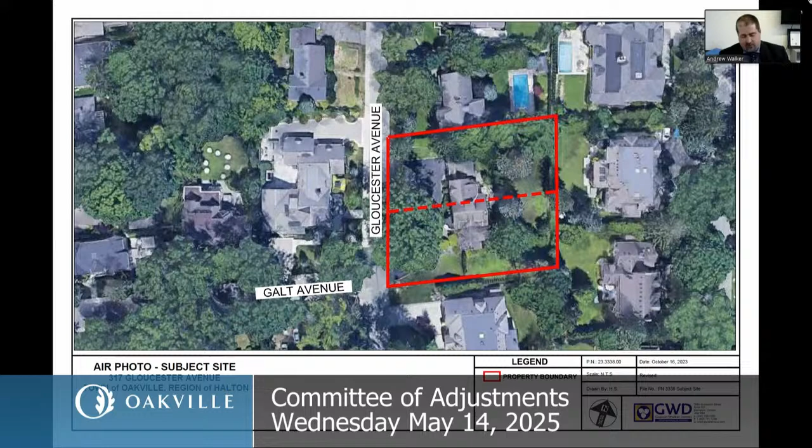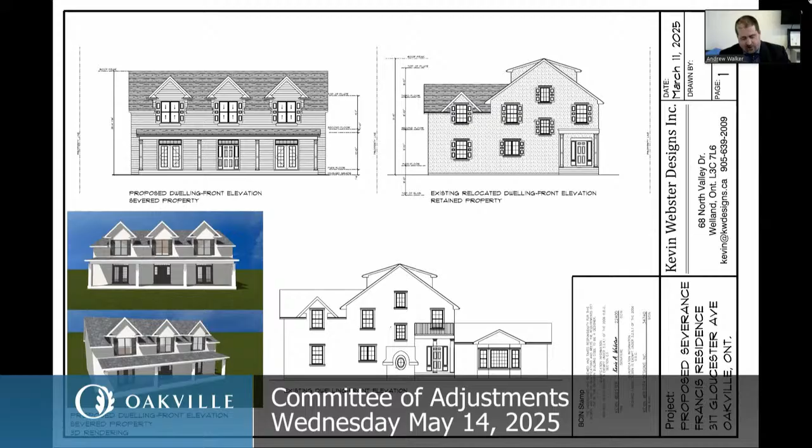I reviewed the variances in the context of the four tests as described in my March 11 cover letter, and am of the opinion that the applications meet the four tests, represent good planning, and are supportable. I've read the staff reports associated with the applications and wish to address some comments made therein. In this respect, I do not agree with staff's position that the applications be denied.

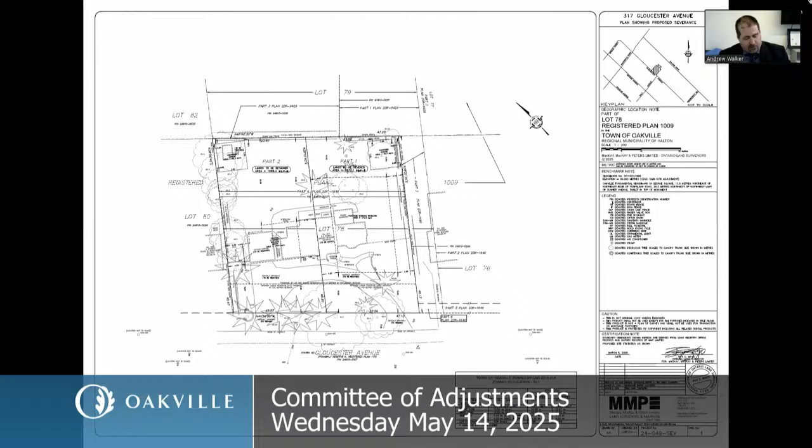One concern raised by staff is that the applications result in lots that are not in keeping with the predominant lotting pattern. I note the predominant lotting pattern in the area is single detached residential, and the proposal results in two lots accommodating single detached dwellings. Further, policies 3.9 and 4.3 of the official plan note some growth and change may occur, including intensification, provided the character is preserved and the overall urban structure is upheld. The proposed development maintains and preserves the overall urban structure, as the proposals for two single detached dwellings are in an area designated for such uses.

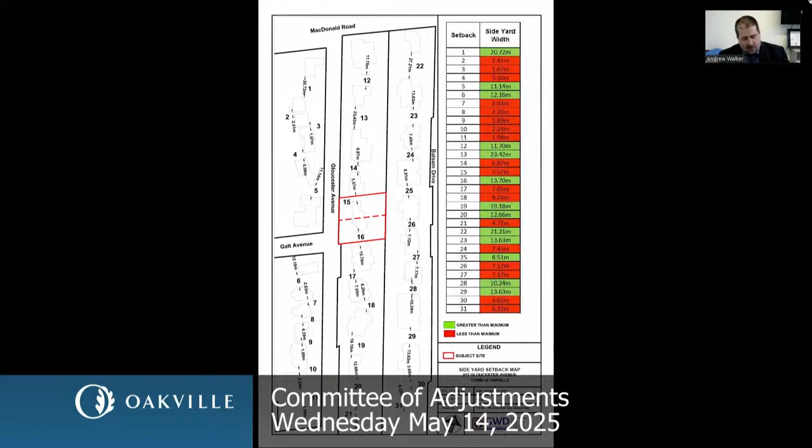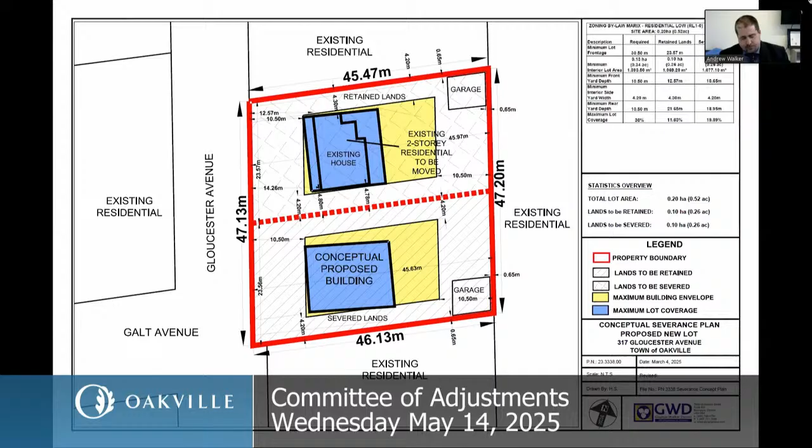Variances result in residential lots sufficiently sized to accommodate single detached dwellings in keeping with the area character. I've undertaken a review of lot areas and frontages within the neighborhood included with the application package, and note there is a wide range, including several lots within the same special policy area with lesser frontages than what is proposed. Another concern raised by staff is that the proposed severance and variances would not maintain the integrity of large lots per policy 28.2 regarding the special policy area.

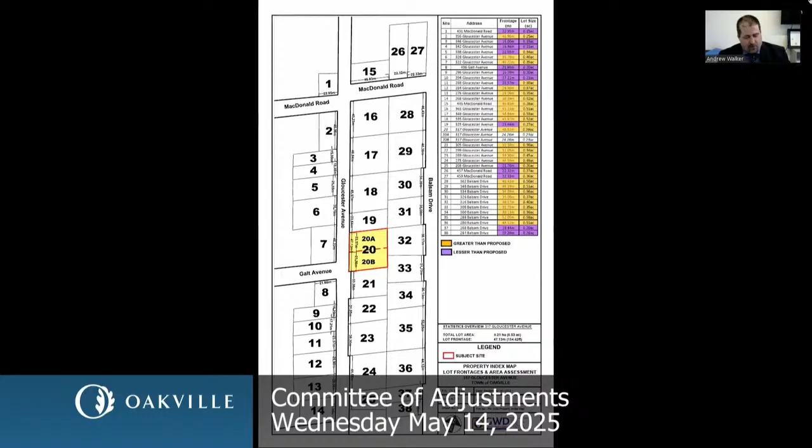Staff do acknowledge the proposed application meets the maximum permitted density of 10 units per hectare, it being 9.09. However, they suggest the proposal does not maintain the integrity of large lots of this special policy area. The official plan does not define large lot; as such, this interpretation is subjective. The proposed reductions are modest and reflect the range of sizes in the area, resulting in lots with frontages over 23 meters each, large lots by any stretch of the imagination.

Another concern relates to maintaining and protecting existing neighborhood character and compatibility. According to staff, the proposal does not conform with policy 30.14.2, which provides direction on granting creation of new lots, noting criteria regarding size, shape of lot, requirements of the zoning bylaw, and whether what is proposed is appropriate and compatible with adjacent lots. Other than the modest relief being sought, my client is not seeking any other variances.

I submitted a summary of side yard setbacks in the surrounding area with the applications, noting there are numerous examples where the combined side yard setbacks are below the minimum. The proposed lots are large enough to accommodate the dwellings with appropriate interior side yard setbacks. In addition, staff note policy 31.5 providing the definition of compatible. I'm of the opinion that the proposal provides large frontages and areas capable of accommodating all required setbacks and as such meets the definition of compatible.

A further concern raised is the inclusion of lands on the west side of Gloucester in the analysis of neighborhood context, as they are located outside the special policy area. One experiences neighborhood context by experiencing both sides of the given street. Regarding staff's opinion, it is important to note that the proposed lots are both twice the size of any of the lots located on the west side.

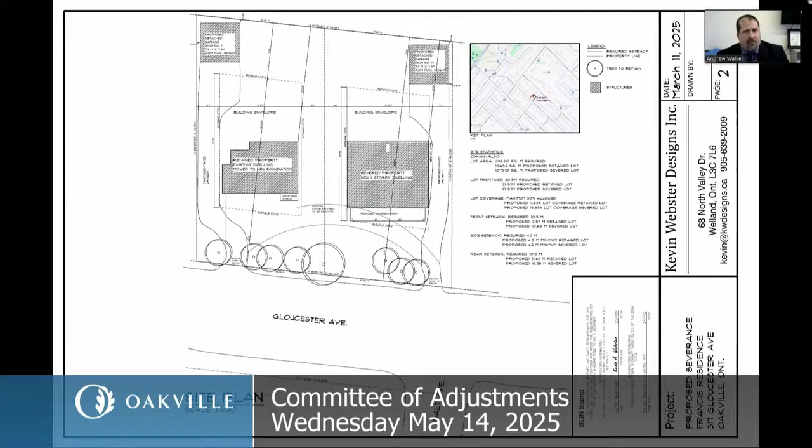This concludes my presentation. I seek the committee's indulgence in supporting the consent to sever and minor variance applications, and I'm available for any questions or comments. Thank you.

Okay, thank you. Ms. Price, do you have any questions for the applicant? Not at this moment, no. Thank you. Mr. Dickie? You're muted, Mr. Dickie.

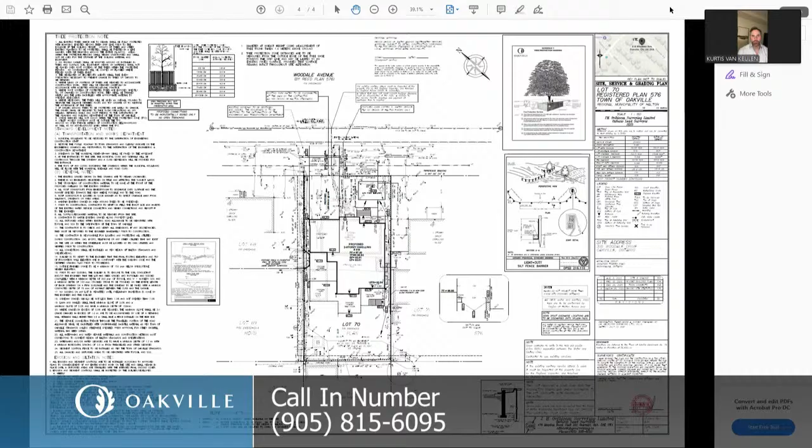Thank you, Mr. Chair. My name is Kurtis Van Keulen, representing the owners of 318 Woodale. Before you, we have an application for minor variance, for one minor variance seeking relief from the zoning bylaw, which is a lot coverage variance. We are seeking 38.6%, where 35% is required.

I want to note that we have reviewed staff comments. We agree with staff comments. They are in support of the application. We are in agreement with the conditions as well.

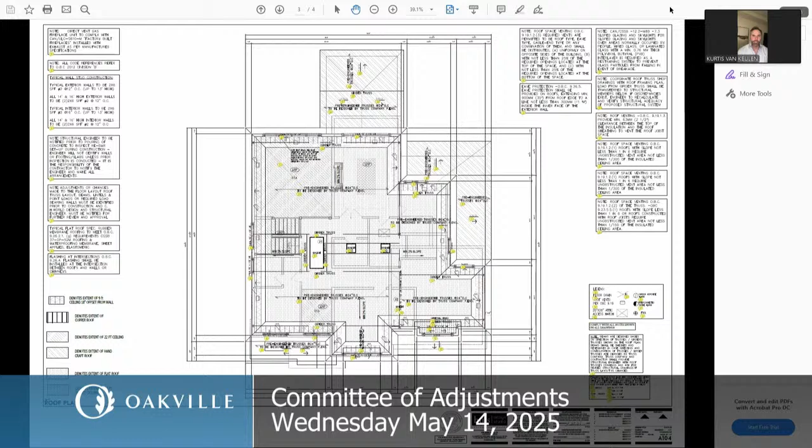I wanted to speak mostly to the contributing factor of the lot coverage variance. It is comprised mostly of a rear single story structure, a rear covered porch. It is single story in height, and it mitigates massing of the main portion of the building to the rear. There is also a good portion that is an uncovered concrete porch.

During construction, the owner, working with town staff and through the inspection process, decided to use the area under the concrete porch as part of their basement space. So they changed the plans, working with town staff and the inspections team. We submitted an application to the building department for a revised building permit, which went through review and identified this lot coverage variance. We then filed the variance application, and we're here before you tonight.

Again, the massing of the structure is of very little impact on the neighboring properties, with more than 50% of that structure below grade, which is not counted by default. The way the zoning bylaw interprets the uncovered concrete porch with a living space below it, it loops it into the lot coverage variance and requires it to be counted. So I want to stress that the impacts on the neighborhood are next to nothing, because most of that is below grade.

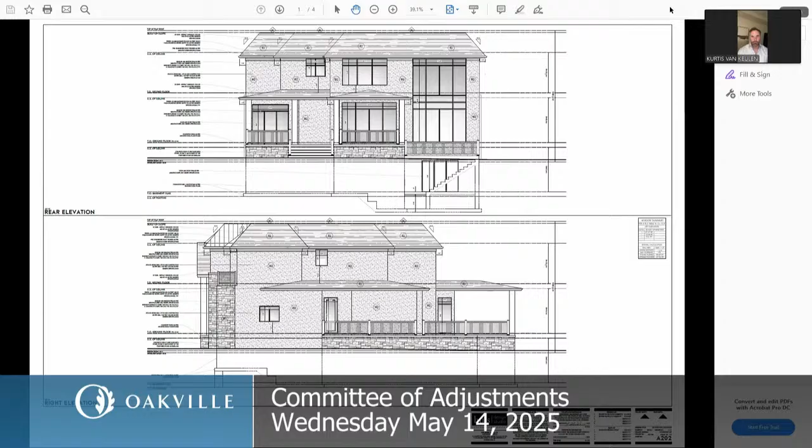Thank you. So just for clarity, do you still require a revised building permit? Yes, technically we do require a revised building permit, and it is in process. The only condition with that revised building permit right now is this minor variance approval for the change in the basement plan, which utilizes the area under the covered and uncovered porches.

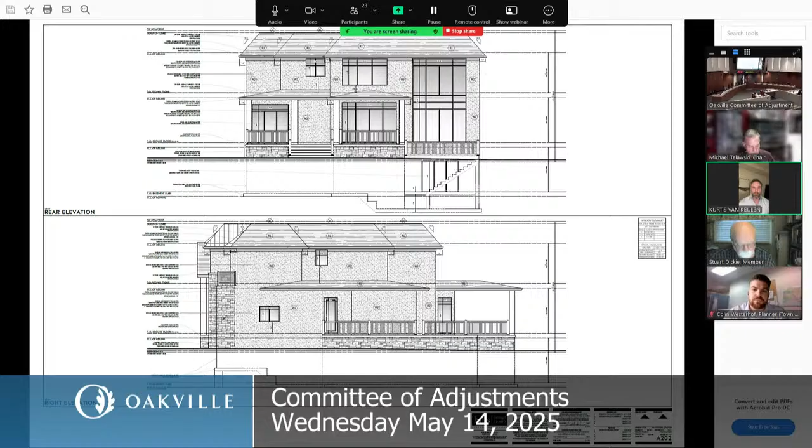And so again, just for clarity for anybody watching or even for the committee, this variance isn't being triggered by the covered porches. It's because you're now including the basement, the area under the back patio, as livable space, and that triggers that area to now have to be considered coverage as if it was just a rear deck, porch, or patio. Without that, you wouldn't require this variance. That is correct, Mr. Chair. Thank you. Okay, thank you.

Mr. Dickie, do you have any questions for the applicant?

I don't know if I wasn't looking in the right spot, but usually when somebody comes in for lot coverage, they tell us how big the footprint is, how big the front and rear porches are, and what percentages. So if you would do that for me right now, I'd appreciate it.

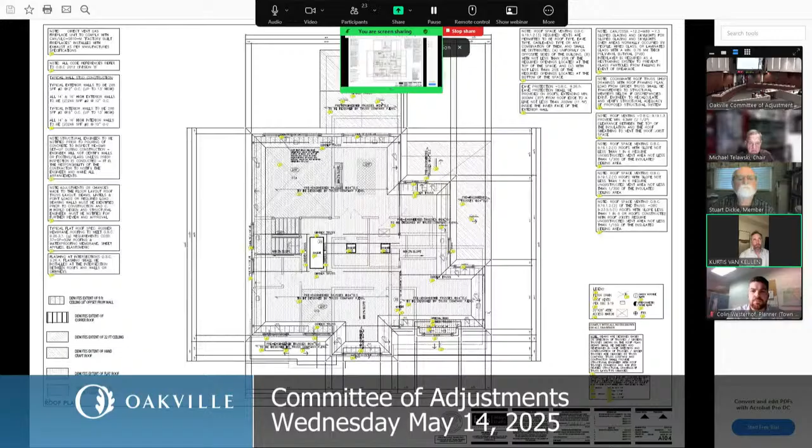Sure. On the site plan, if staff wants to pull it up, we do have a lot coverage breakdown on the right-hand side of the page. I believe it's the last slide of the supporting documents submitted, just under the key map, top right corner. The total lot coverage is given there.

And I do have a breakdown here. We have a small portion of the front covered porch, about 4 to 5 square meters. We have a rear covered porch of about 14 to 16 square meters, and an uncovered porch that puts us over the area, about 15 to 16 square meters.

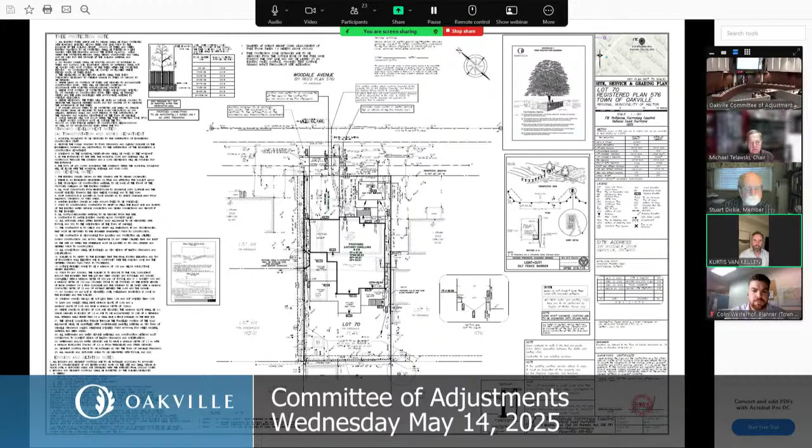So the covered porches combine and are included in the lot coverage, and the dwelling itself is well under the allowed lot coverage. If you zoom in on the bottom left corner of the dwelling footprint, you can see a large uncovered porch and two small covered porches. The main massing of the building is well under the 35% required.

Obviously, I couldn't see that. It's a bit hard to see some of these, through you, Mr. Chair. Hold on, I'm on the right page, but it doesn't tell me. I'm sorry, I asked you, what was the footprint?

What percentage of the lot is that footprint of the house? What is the porches' square footage or meters, and what are the percentages of the lot? I don't see that on the piece I'm looking at. You're saying on the one in front of us, that information is there?

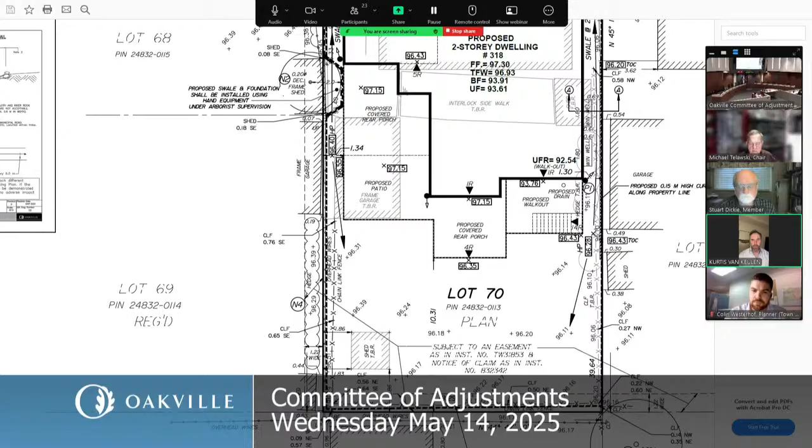On the one currently on the screen, through you Mr. Chair, it's zoomed in to the footprint. If staff would pan over to the right and up, there's a chart breaking down the lot coverage, showing the maximum allowed and the proposed.

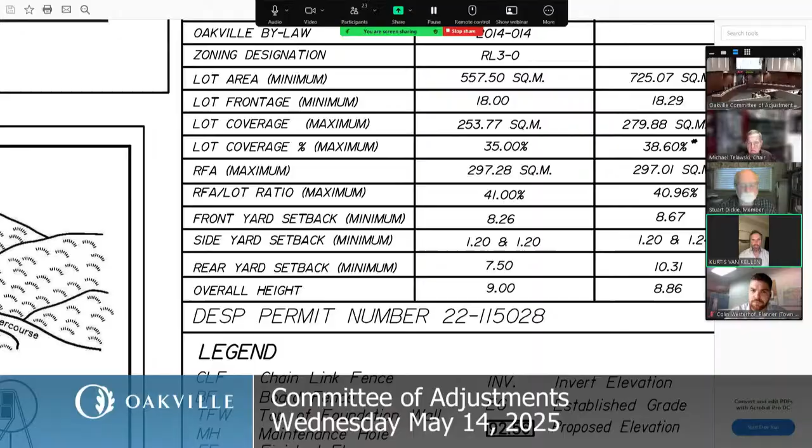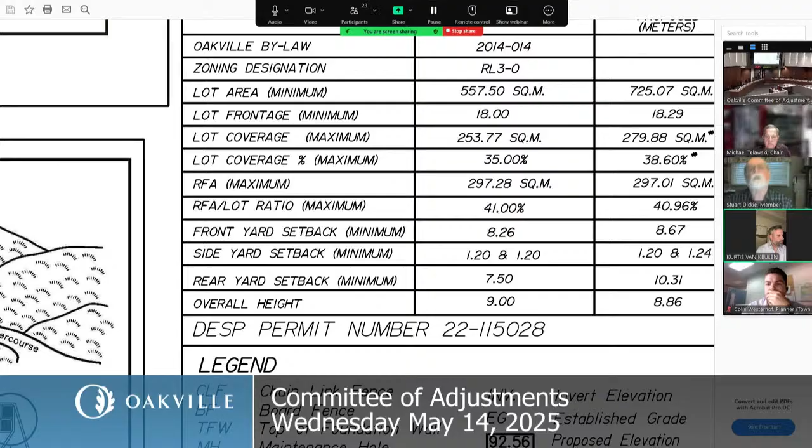Yes, but that's not answering my question. Okay, I would have to. Again, my question: what is the footprint of the house and garage, and what percentage of the lot is that?

You would have to give me just a minute to pull up another file. Just bear with me, please.

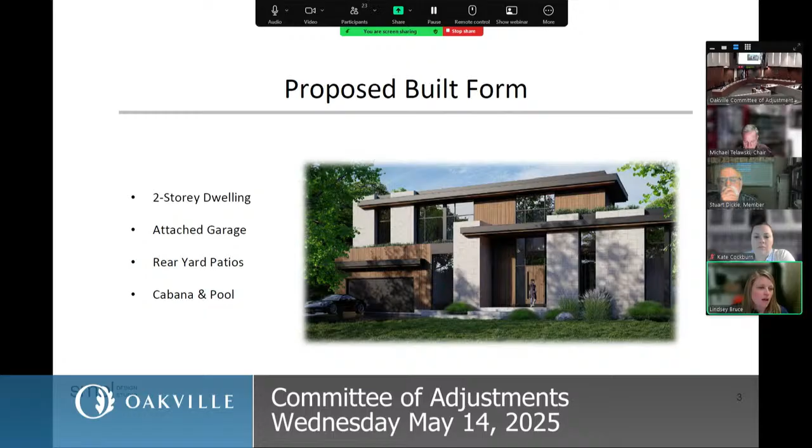The existing context is a 1-story dwelling with an attached garage. We're proposing a 2-story dwelling with an attached garage, with a rear patio, cabana, and a pool in the back. This is an image of the overlay showing the existing dwelling with the new dwelling on the site.

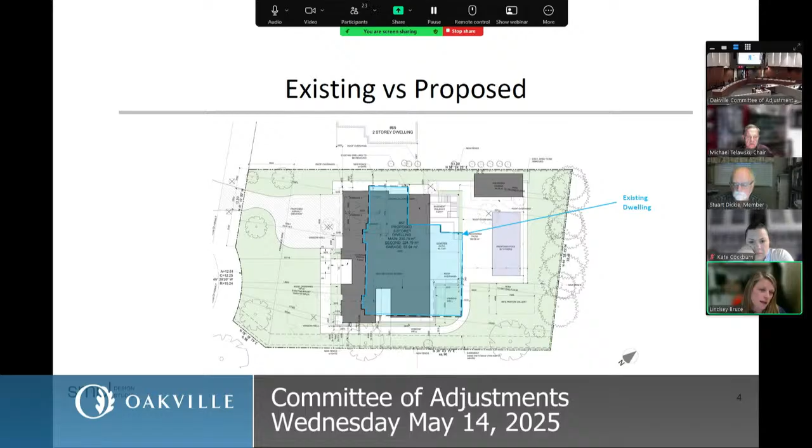The first variance we're requesting is the same as the previous application: a window well encroachment into the required front yard. This is a window well between the garage and the front porch. There's a basement window there, and the window well is wider than 1.8 meters, so we are proposing to encroach into the front yard.

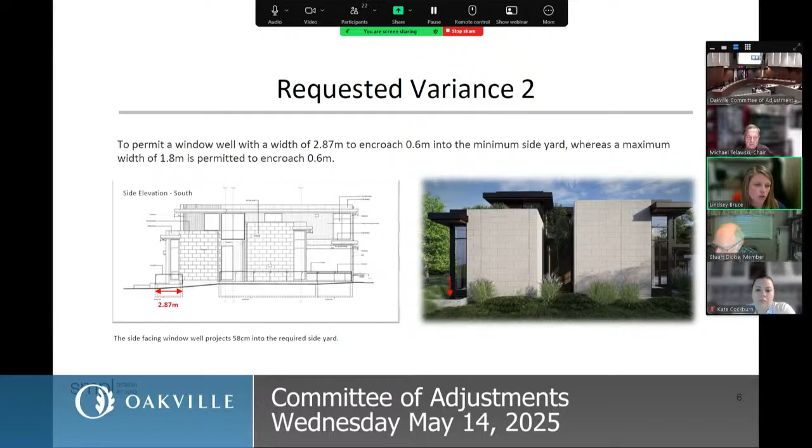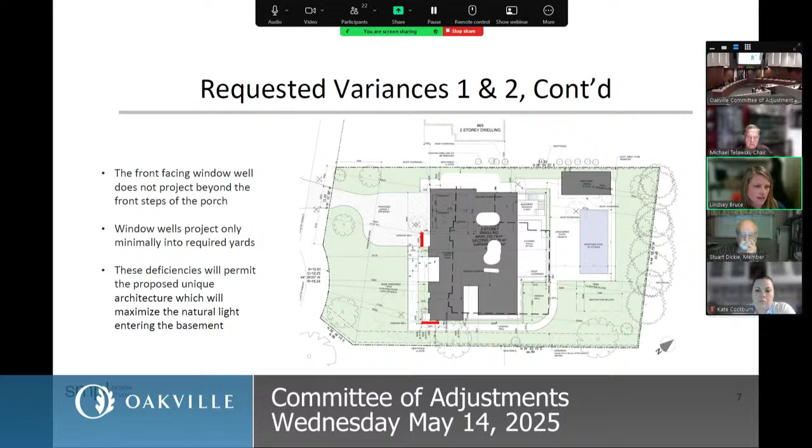Very similar, we've got a window well in the side yard at the front south corner of the home, which encroaches into the required side yard. This shows those 2 window wells in plan view, so you can see where they're located and how far we are still set back. That side yard is 4.2 meters, and we are encroaching minimally into it.

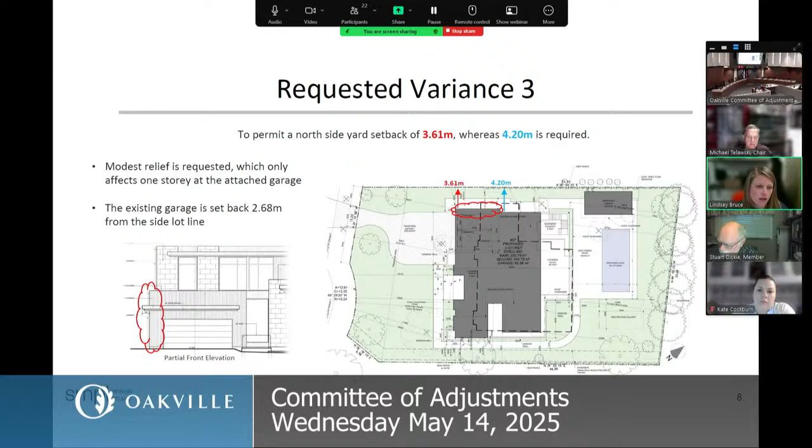This is where the application differs from last time. Previously we were asking for a front yard setback of 14.87, I believe it was 14.88 actually. We worked with the neighbor to the north, number 65 Cox Drive, as they had come to committee with an objection. We worked with them and came to an agreement on moving the house back 1 additional meter.

The reason we're asking for relief in the front yard is because of how the lot is situated, pushing the house back really far. We're at the end of the street on a cul-de-sac, and the final house next to this property faces right onto Lake Ontario. In order to have a usable backyard with the pool, we also want to maintain the mature trees along the back of the property to help mitigate privacy issues with the neighbor behind, whose house faces Lakeshore. So in order to provide amenity space in the rear yard, we've pushed the dwelling up slightly.

You can see here where the existing dwelling is located. The other thing contributing to this corner being closer is that the lot line is on an angle, so on this side of the house we're actually meeting the front yard setback. It's just this front corner where the lot line comes back, while the house itself is straight.

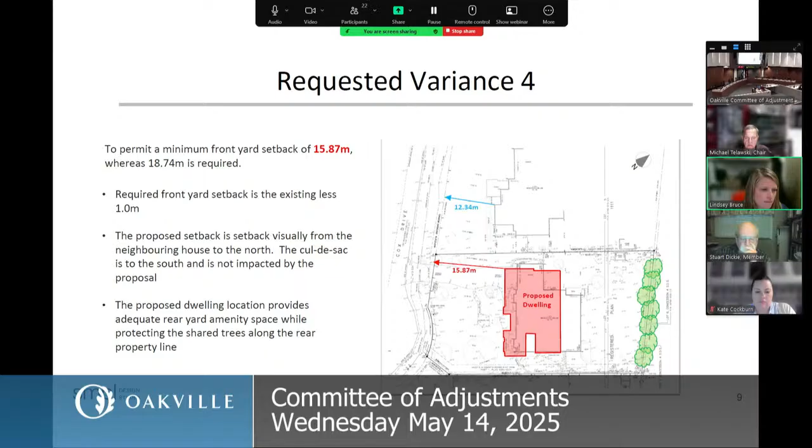Neighborhood consultation was done back in February before the first hearing. The only objection we had was again from the neighbor to the north. We have since come to an agreement with that neighbor, and they're no longer in opposition. There was no other opposition received from the canvassed neighbors.

The town staff planning report does support the application. We are currently in review with the grading plan and arborist report to make sure all of those items are addressed. We have initial feedback from them and everything's looking positive. I'm available for any questions if anyone has any for me.

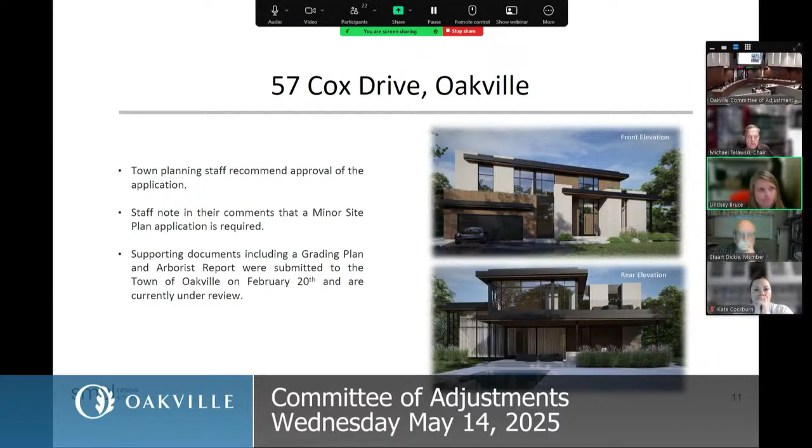Okay, thank you Ms. Bruce. Mr. Dickie. Thank you, Mr. Chair.

I'm always concerned about setback. Here you have a 100-foot wide property. Why can't you comply with the side yard setback?

Can I answer right away? Through you, Mr. Chair, the dwelling depth - we've maintained the allowable dwelling depth while also maintaining the lot coverage and GFA allowable. We're under all of those items.

We're in a really affluent neighborhood, we have resale value to think about. The owner is moving into this home, but it's always considered when doing a new build. In order to work with the architecture, the one-story garage projects out the side to add some character and change the massing on the front so it's not one big two-story box. That slight projection on the side of the garage is what's leading to the encroachment into the side yard. Again, the neighbor has no issues with that side yard, and it's adequate for providing great drainage, swales, and anything else needed on that side yard.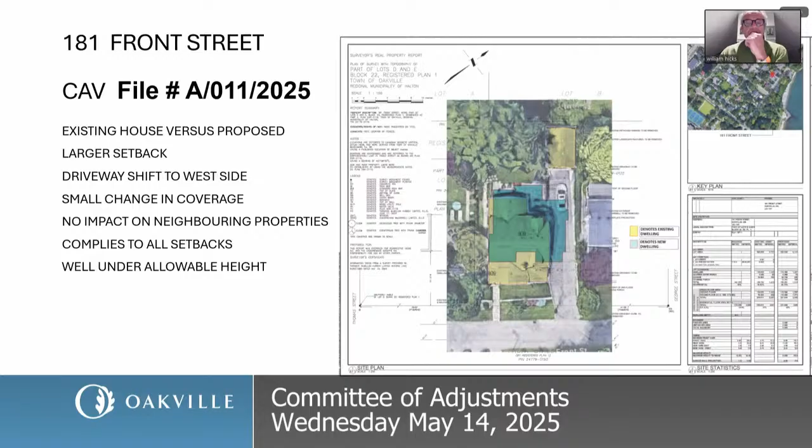I think it's a good example. If I just flip to the next couple of pages, I'm not going to spend any time because I know that's the landscape plan. Some of the residents had raised concerns about the grading. I know there's been a reference to this being a gully in the new district plan.

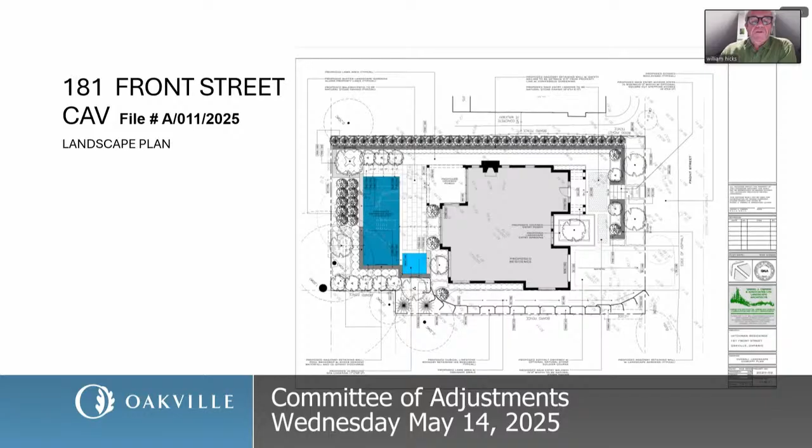It's not something that the heritage staff have mentioned as not complying to that. I don't really understand how it's considered a gully. There is a slope at the front of the property that's shown on the front rendering, but we've tried — if you go to the next slide, or the one after that, we've done some renderings of what the house will look like from the back. We think it's quite sympathetic to the character of the neighborhood.

It doesn't try to mimic or copy a heritage piece, but it uses elements that are certainly consistent with it. One of the heritage guidelines that we weren't aware of, that apparently was fairly new, is you're not allowed any metal roofs. So that's a simple change we'll make with heritage. And they had a couple of other minor questions, all of which I think are easy to resolve with heritage.

But I won't speak to all the neighbors' concerns. I have gone through in detail all of theirs. I'll let them speak. I mean, I think their concerns will come down to views. They don't feel it meets the requirements of the district plan, which certainly planning does feel that. I think the grading is misleading.

We've dealt with these for hundreds of applications. The grading is designed properly. But I will let the residents speak, and certainly open myself to questions from the committee first before the residents, or after the residents speak. I'll leave that up to you. Thank you for the time to make the presentation.

Thank you, Mr. Hicks. Committee members, any questions for Mr. Hicks? Yes, I have a question. Go ahead, Ms. Price.

In terms of height, where are you measuring from? Are you measuring from the top or the bottom to get the height of the house? We measure the height from the bylaw requirement, which is taken at the center point of the front lot line. So it's in the slope. It's not at the bottom part of the slope, but we've changed the grades there. But that is measured based upon the bylaw requirement. So okay, thank you.

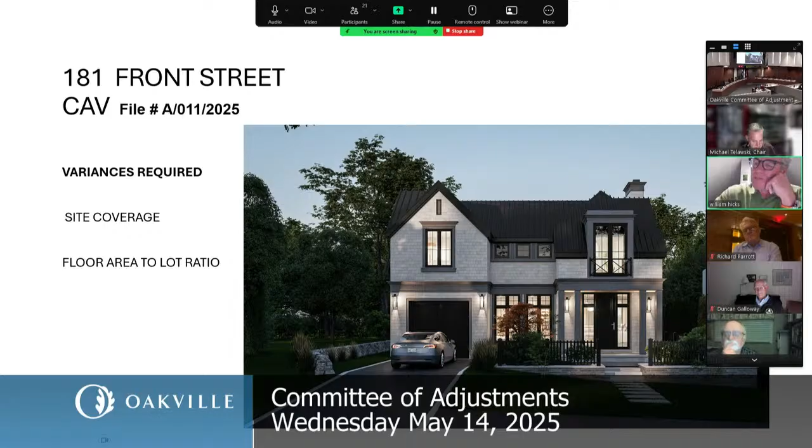But with that, I will—there's a hockey game on, you probably all want to go home. Thank you, Mr. Chairman and members. Well, we've got 3 more applications after this one still. I don't think you want to know the score anyway, so.

Okay, thank you. I'm going to close the discussion at this point. Committee members, you've heard many different views. Obviously not all of them aligned, and perhaps not even alignment between the Residents Association and the Heritage Committee. But with that, I will be looking for a motion on this matter.

Mr. Dickie. Thank you, Mr. Chair.

Based upon my review of the owner's application, site plan, building elevation, my site visit, the presentation by the owner's consultant, the planning staff's report, and having regard to the comments and letters by the neighbors, it is my opinion that the variances are not minor in nature. I feel that this is an overbuilding of that site. From my calculations, the proposed house is 40% larger than what the zoning law permits, and I agree with the neighbors that this house is not desirable or appropriate for this. Therefore, I put forth a motion that the application as applied for be denied.

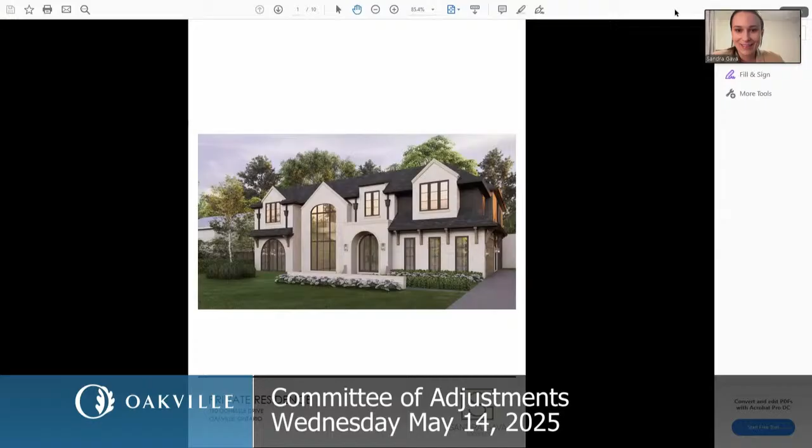Thank you for pulling up the presentation. If we could go to the next slide please, to start. Just a quick overview: we've come a long way from our initial pre-consultation. Firstly, addressing the concerns relating to reducing the building features that didn't align with urban design guidelines, and issues related to orientation and drainage. After our first deferral, we made reductions to the building depth and FSI to alleviate concerns about the overall scale of the building. And then lastly, after our second deferral, we made the decision to eliminate the height variance, which alleviated the outstanding concerns from planning staff about the overall scale of the proposal.

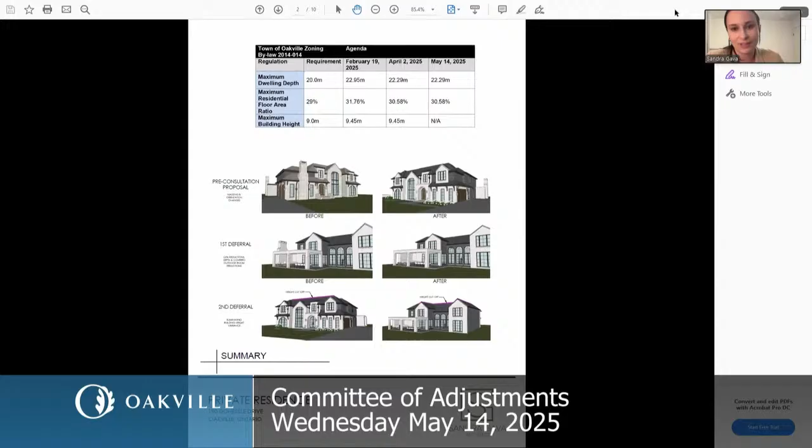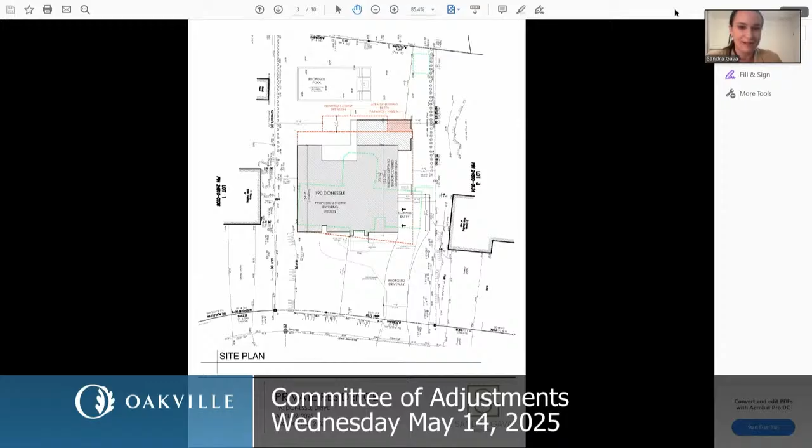If we could please go to the next slide. So I'll speak now to the two variances that we are asking for, the first being the building depth. Our building depth variance is in relation to a one-story covered outdoor room. The majority of the mass of the home is at 16.68 meters, and if you take a look at that red outline, given that we're allowed a one-story extension, the variance we're asking for is in that red hatched area, which represents 10 square meters of floor space that we're not allowed to have.

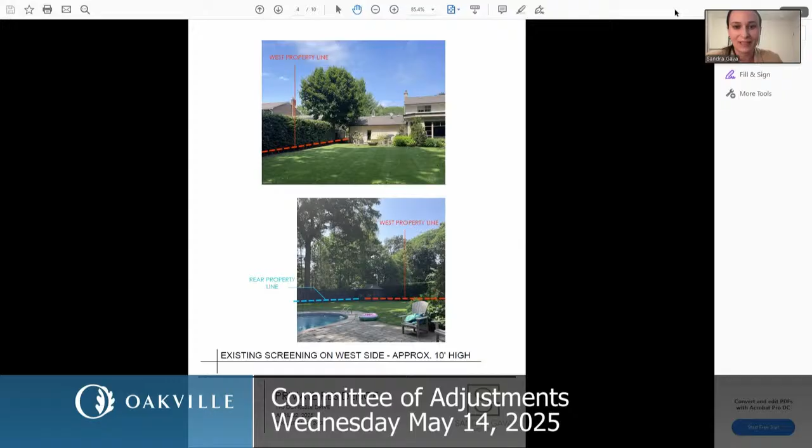Can we please go to the next slide? This is just to illustrate the existing screening on the property on the west side, which is a very dense hedge, about 10 feet high, going from the existing garage all the way to the very back of the property. Next slide, please. So in context, our covered outdoor room is just over 10 feet. We believe it would be fully screened by this hedge, and it wouldn't have any meaningful impact to the neighbor to the west.

And can we please go to the next slide? So in terms of FSI, we're asking for a 1.58% increase. At a macro level, we're in line, if not lower, than many of the recent approvals in the neighborhood. Next slide, please.

Qualitatively, we don't believe the FSI is contributing to the overall appearance of a larger building on the lot. We believe our design is in line with the character and massing objectives of the urban design policies, with lots of varied roof lines and architectural features at the one-story level. We are set back 7 meters from one side due to a side entrance garage, which we believe is a nice feature, not being able to see the garage doors, and it contributes to an overall narrower home. Even though we're not asking for a height increase, we're at 9 meters. Our established grade is quite low on the street, so in terms of the height in relation to adjacent grade, the overall building height is about 8 meters.

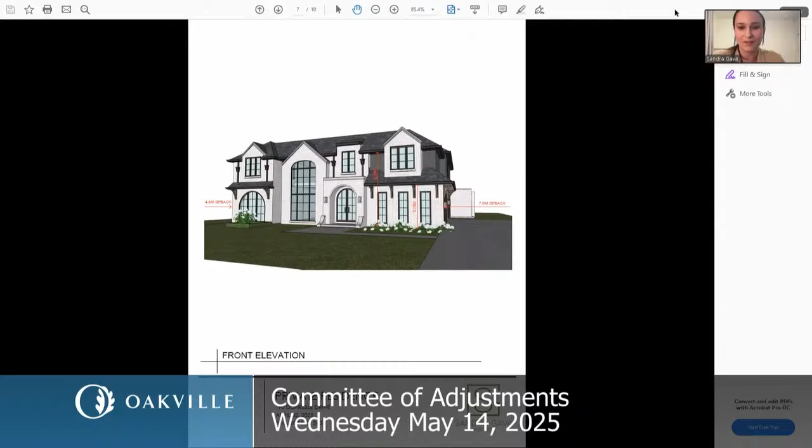So overall, setbacks, height, depth — we don't think any of those perceivable, tangible things are contributing to an increase in perceivable FSI, and we believe that the project meets the 4 tests of the bylaw. Thank you, and I'm here if you have any questions.

Thank you. Any questions for the applicant? No, okay, I see none. Madam Secretary Treasurer, has anyone called in on this matter? We've had no calls.

All right, then I will close the discussion and volunteer Ms. Price to make a motion. Taking into consideration my site visit, the owner's report, the agent's presentation, and the staff report, and the fact that there were no objections, I believe that the 4 tests have been met and therefore the variance can be considered minor in nature.

I recommend the owner's application be approved subject to the following conditions: that the dwelling be constructed in general accordance with the submitted site plan drawing dated February 18th, 2025, and the elevation drawings dated April 3rd, 2025, and that the approval expires 2 years from the date of the decision if the building permit has not been issued for the proposed construction.

Okay, thank you. Any discussion on that motion to approve? Seeing none, all those in favor? I approve. That is unanimous. Your application has been approved. Thank you. Have a good evening.

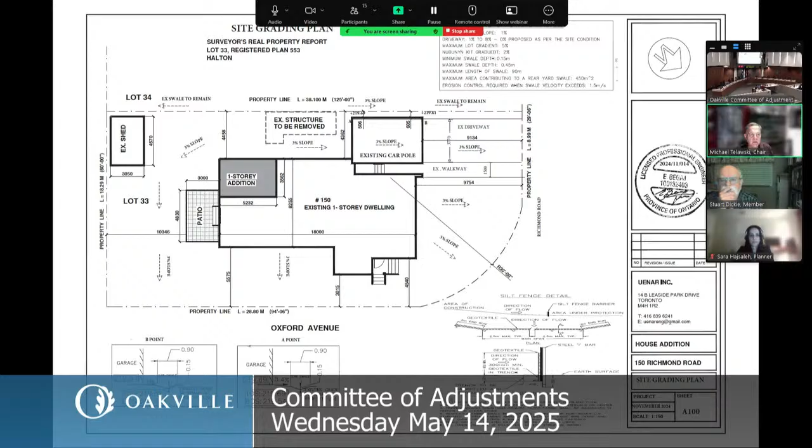It sounds also like they've not had a chance to review that at this point in time. Sharon promised me that she's gonna show those changes to the committee members. As I said, there were not too many changes, only the switch of the points. The front of the garage was supposed to be the end of the garage. So that was the only thing on the site grading.

But this committee does not review and approve grading. This committee deals with the variances, and we have a staff report in front of us that says you haven't provided the required information in order for them to be able to support the application, so they can't support it.

Mr. Chair, I did provide the staff with what they wanted. They disagree, as I said, so on the site grading, it's a switch of 2 points. That's the only thing that they are saying there.

Everything is in the site grading. First of all, I don't know why they asked, but everything is going to remain as it is right now, so we're not going to change anything. And if you can see the house, both houses are separated from each other by the same distance. There isn't too much flow of water coming from that direction, because the other owner also planted a lot of small trees there. So I don't think my client is prohibiting any water coming through, and it's not coming too much.

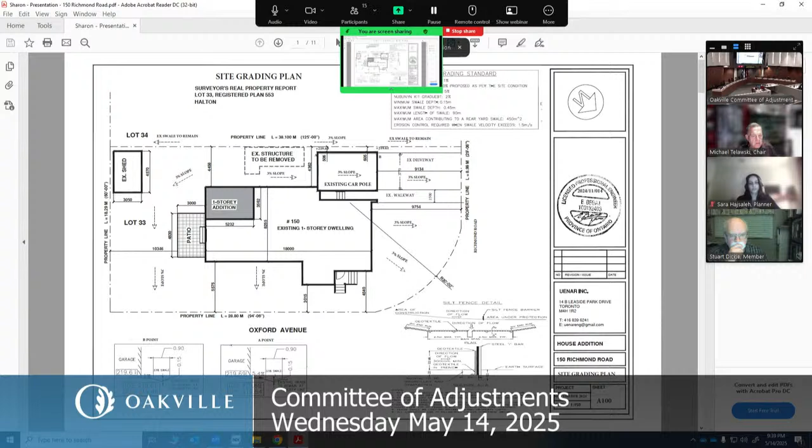Yeah, no, that's the previous one. That's not the... okay, thank you, yeah, that's the changed one. Yeah, I can see that. Let me ask. No, sorry sir, can we just stop?

Madam Secretary Treasurer, you were going to add some comments? Yes, I did receive 2 new drawings from Edward yesterday or the day before, and I said we would share them during his presentation, but it was too late to add them for the circulation. So we've put them up on the screen now, the 2 new drawings.

Can I comment on those? They are part of his presentation.

Okay, so these are revised drawings. The revisions are point A was point B, and now point B is point A. So I switched the points at the garage, at the site plan, not below where the sections are, but only on the site plan. Because point A was lower than the front point of the garage, so they needed to be switched, and that was the only thing.

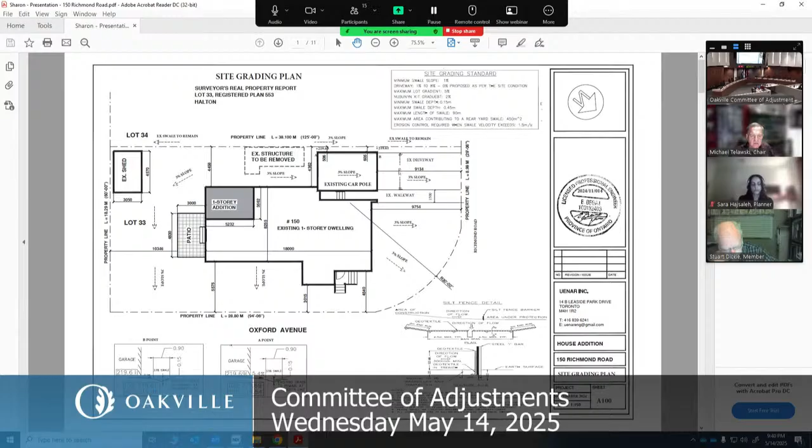There's also, you had a cross section that showed an encroachment into the neighboring property. The cross section is on the other page, another page that I supplied. You can see that I changed that to 12 inches and 4 inches, so it's 16 inches total. Before it was 26 inches.

And you can see that the foundations are inside, not outside. They're shallow foundations, so we did a lot of things not to interfere with the neighbor as much as we could. Right now the existing carport is like 20 inches coming out of the post, but as I said, we're going only 16 inches instead of 24 that was before.

And again, to planning staff, you have not seen or reviewed these drawings. Through you, Mr. Chair, that is correct. We have not received the new revised drawings.

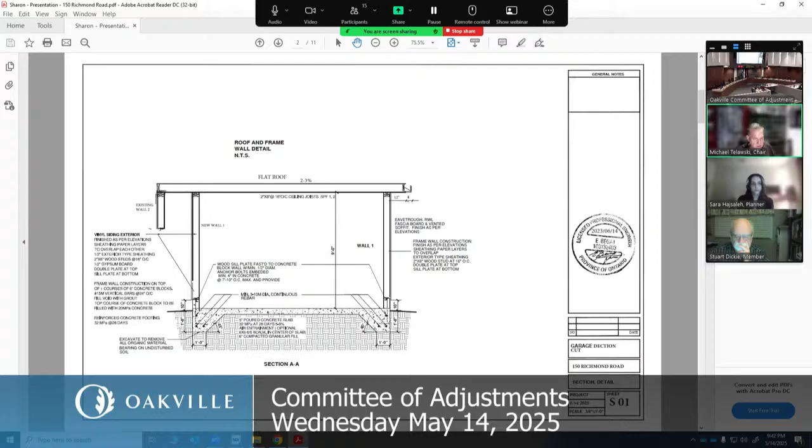Okay, and so again, sir, it's your desire to proceed with this application tonight, despite the staff comments? As I said, I don't know. I went to deferral one time. For me, these look like very small things to deny this application. The owners are waiting for 2 years now, and I just want to continue. I'm not going to go to deferral, whatever the decision is going to be. I don't know, maybe I have to consult the owners.

As I said, those drawings are there for the planners to see. There are very small changes, it's only 4 inches going back. I changed the points of the elevations, so I don't know if there are big things to be concerned about. They have it, they can check it, and I will agree with their decision.

You're asking the committee to accept technical amendments that haven't been reviewed by the town staff that reviews these matters. But that's, again, if you'd like to proceed, we'll see what the committee has to say. It's your choice, you can seek another deferral. I will give you that opportunity, or we can proceed with the matter and get a decision one way or the other. Please proceed, sir.

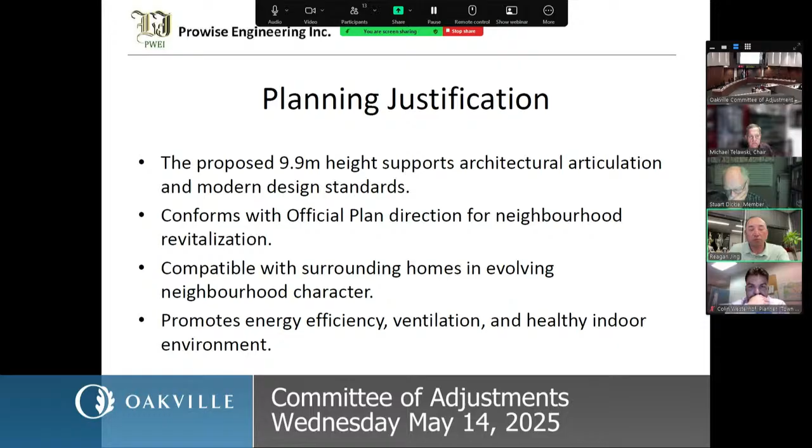I talked to the majority of the neighborhood. I got 7 letters of support - it's not no objection, it's support. Then there were two objections: my immediate left neighbor, the west neighbor, mainly objects to the depth of the house. The depth of the house has already been reviewed and there's nothing beyond the bylaw.

Now I'm seeking for the relief - it's really for the height. Then the second objection relates to the floor area, but we're not seeking any floor increase like in my previous request. So right now only the height - I believe the whole neighborhood wants this granted, relief from 9 meters to 9.9. I got 7 support letters.

Next slide. I'm also not seeking any major height increase, only seeking a normal house - it's a current custom home. The height is first floor 10 feet, second floor 9 feet, nothing beyond that. It's only the roof portion of the house that's beyond bylaw requirements. The majority of the house volume meets bylaw requirements. So I believe my request should be considered. That's my presentation, thank you so much.

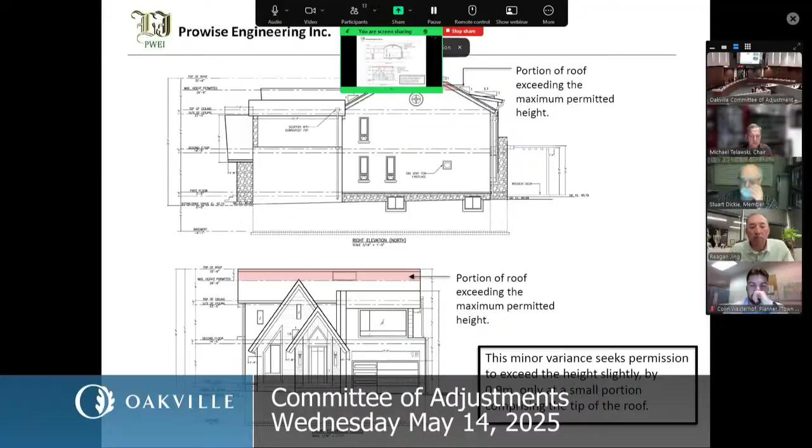If you look at the nature of the lot for my neighbor on the west side, their backyard is half like my backyard. No matter how I try, for a new house design that makes sense, it's never possible to make it shorter unless I keep the old house as is.

The other thing — I address my backyard like a deck. We don't have any balcony on the west end. Even the window is quite small, only on the front portion like the living room. The back portion is my bedroom, and there's no window on the west end at all. Also, the deck is already past my west neighbor's lot line.

Whatever objection is considered, I think it's unfair for me to develop a new house there. Everything — we already have a building permit, have had a second review for the comments, and there's no lot depth issues or other comments. So it's almost approved. Other than the height, I want to keep the house at a reasonable living height, as the majority of houses in Oakville are. That's my answer to whatever the objections are.

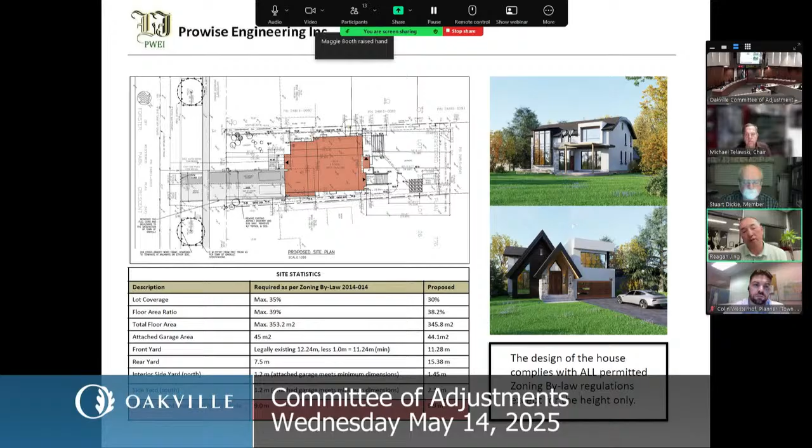Madam Secretary Treasurer, is anyone else called in to speak? We've had no other calls. Maggie Booth would like to speak again.

Sorry, you've had your opportunity, and the applicant gets the last opportunity to respond. So unfortunately, I can't let you come back in. I'm going to close the discussion. Committee members, once again, you've heard opposing views tonight, but I'm looking for a motion on this matter.

Mr. Dickie. Thank you, Mr. Chair.

I feel that the increase in height is not minor in nature. It's not appropriate for the development of the site in regard to the adjacent houses, which are only 1-story dwellings. I haven't seen anything taken into account to mitigate against that mass and scale impacting negatively on the adjacent houses. So I put forth a motion that this application as applied for be denied.